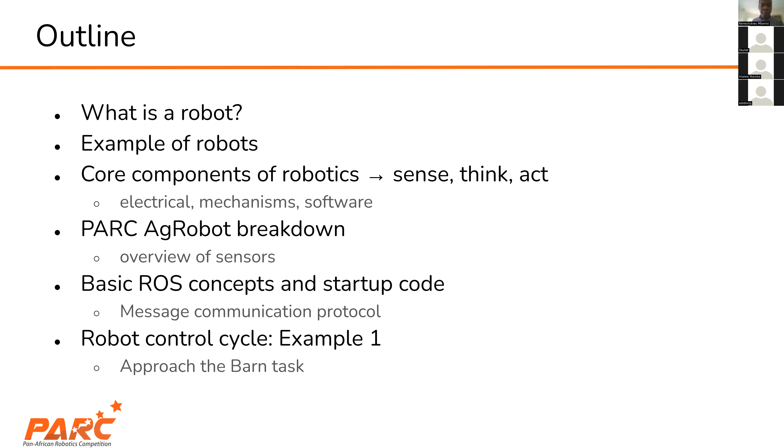All right, so we'll just go ahead and start. What is a robot? I think that this is an important question to grapple with. I wonder if anybody in the chat wants to unmute themselves and try to give a definition of a robot. What is a robot?

This is from a dictionary. A dictionary says that a robot is a machine that resembles a living creature in being capable of moving independently and performing complex actions.

Oh, sorry, Andrea, you need to... Okay, you can go ahead.

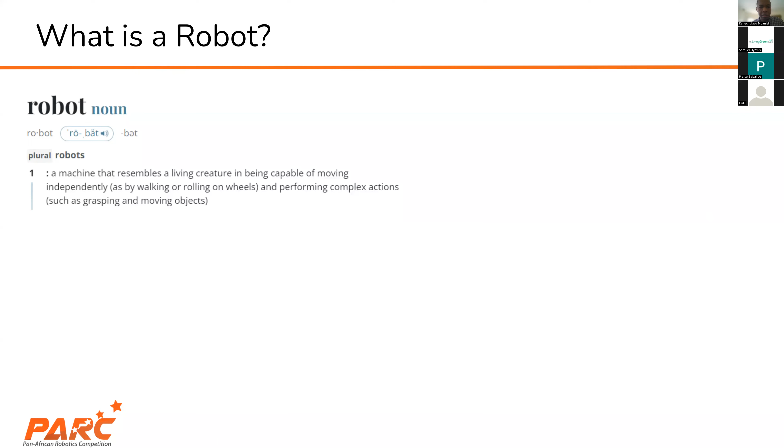Okay, so that definition is a bit too general. The only main thing it says is that it is a machine that resembles a living creature. That doesn't really capture what the robot is, I think.

So there's this other definition, this one is from IEEE, if you're aware of IEEE, Institute of Electrical and Electronics Engineers. It's a society, and they call a robot an autonomous machine capable of sensing its environment and carrying out computation to make decisions and performing actions in the world.

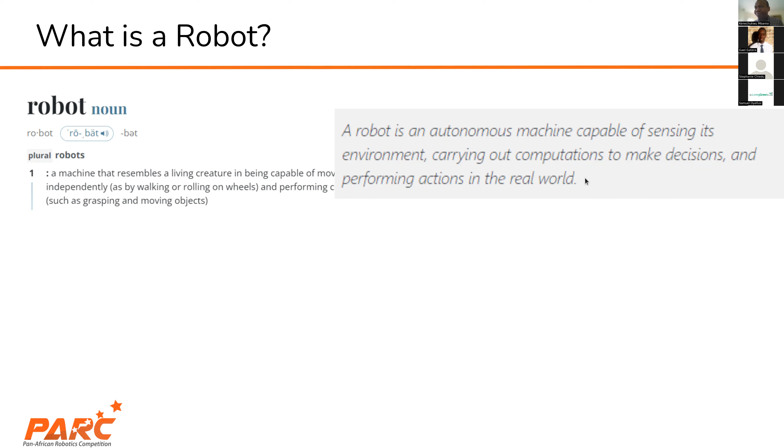All right, and then one other definition, this is from Wikipedia, also very similar. It says here that a robot is a machine, especially programmable by computer, capable of carrying out complex series of actions automatically.

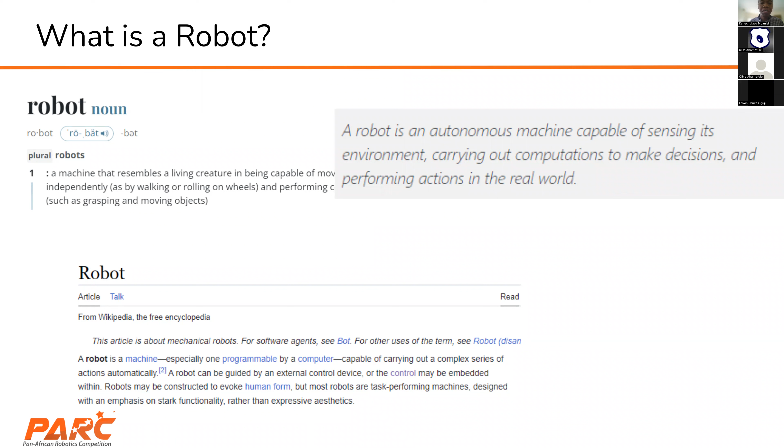All right, so now that we have maybe some idea of a robot, I searched on Google, just Google images, image of a robot, and this is what I got. If you search on Google, just put robot on Google, you will get these images. What do these images have in common? What is the common theme around all these images of robots? What is one common thing about them?

They look like human. Yes. Who said that? Who was that? I didn't see you. Is it Arnold? Arnold, yes, Arnold, you are absolutely right.

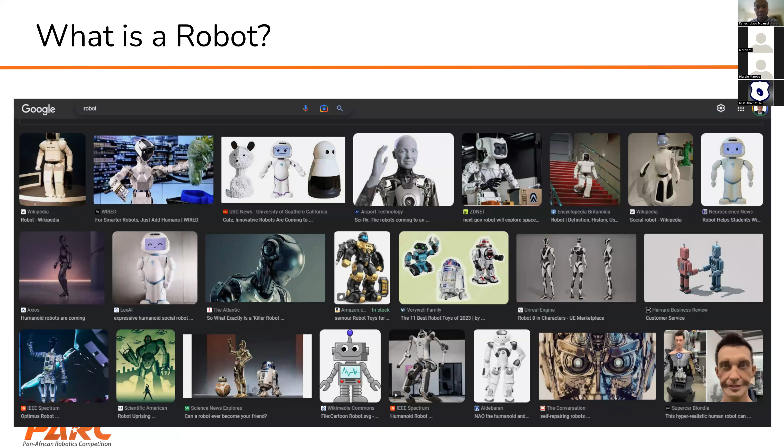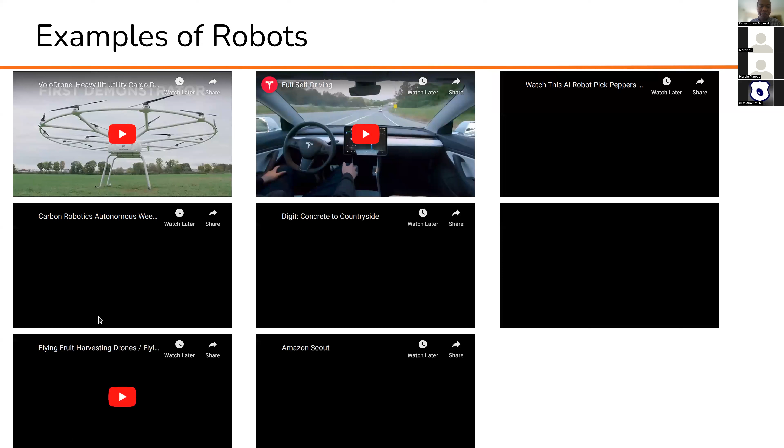Okay, so I'm going to show you a bunch of robot examples. They're all very different, and all very, very exciting designs. So hopefully you can see, I have a bunch of videos here.

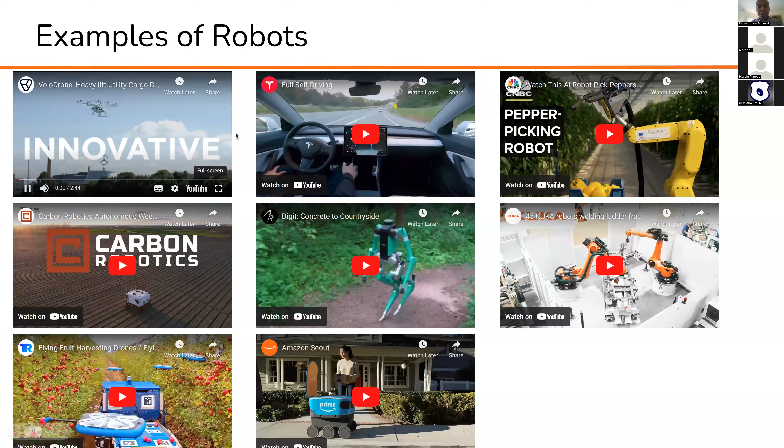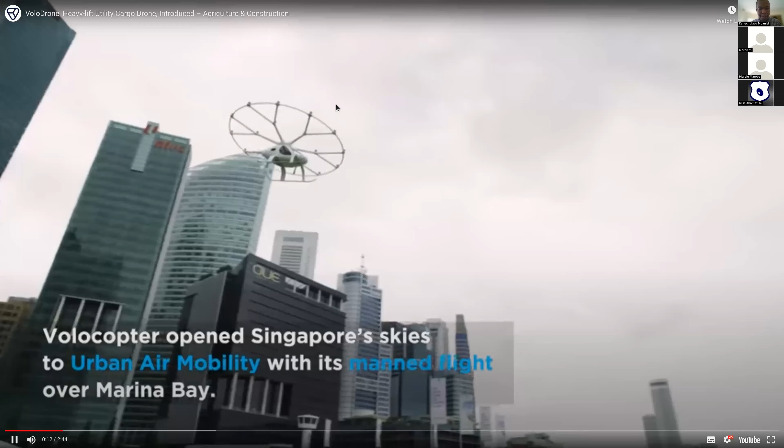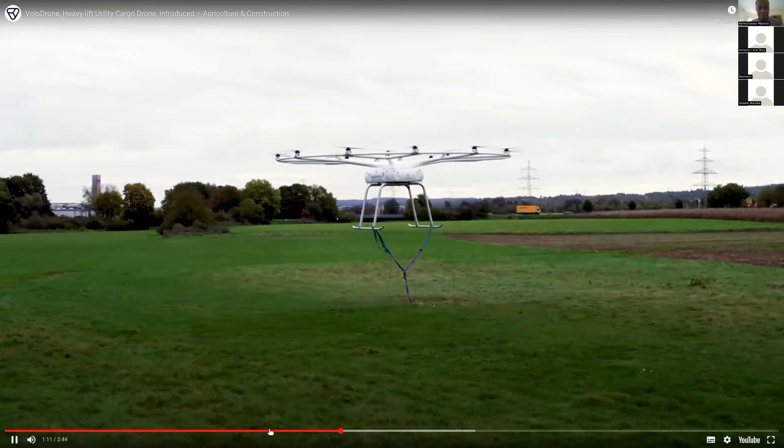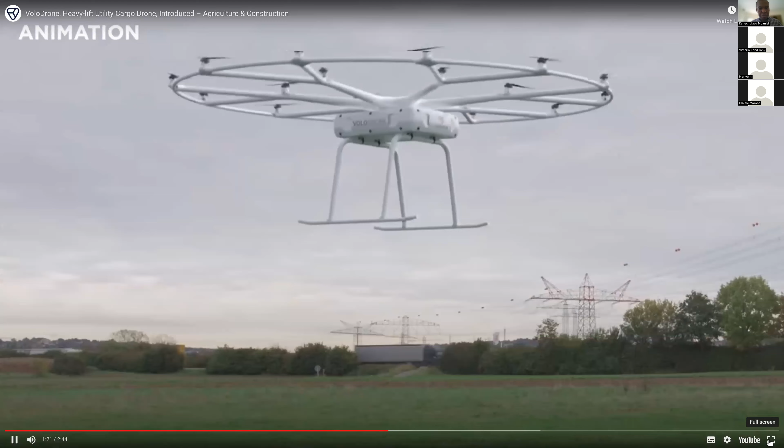All right, so that is one example. It's a cargo drone, heavy duty cargo drone. You can use it for delivery of items, you can use it to even transport heavy items and other things. So that's one example of a robot.

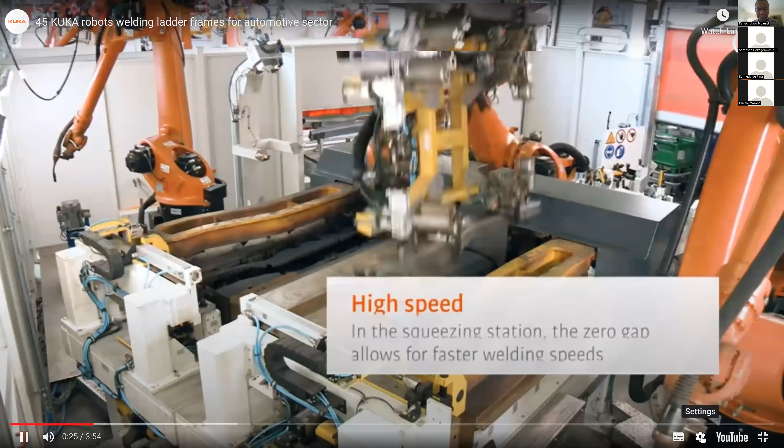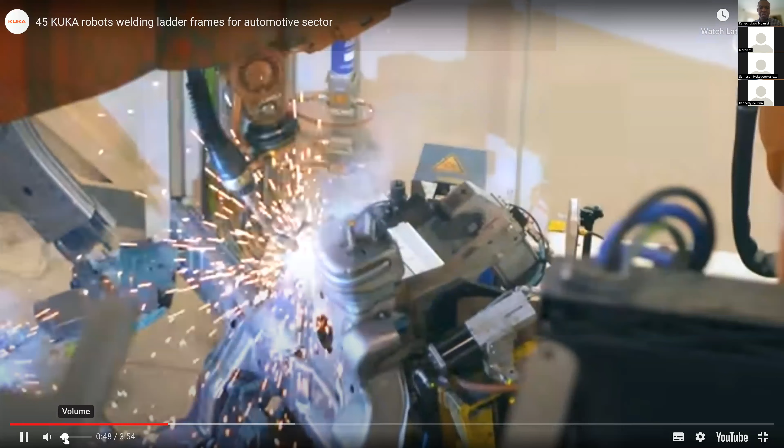So these are industrial robots that are usually applied in the automotive industry. These robots are actually building different components of a vehicle. The robots have sensors to know where they need to move to. They can pick up objects, they can place objects. And this way you can have a fully autonomous assembly line for a car.

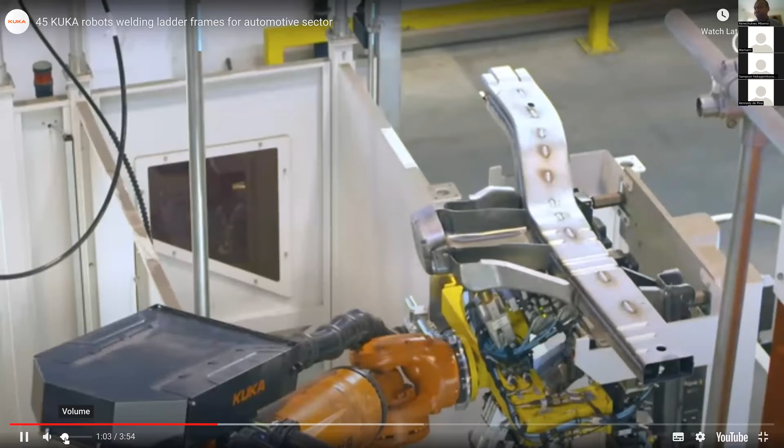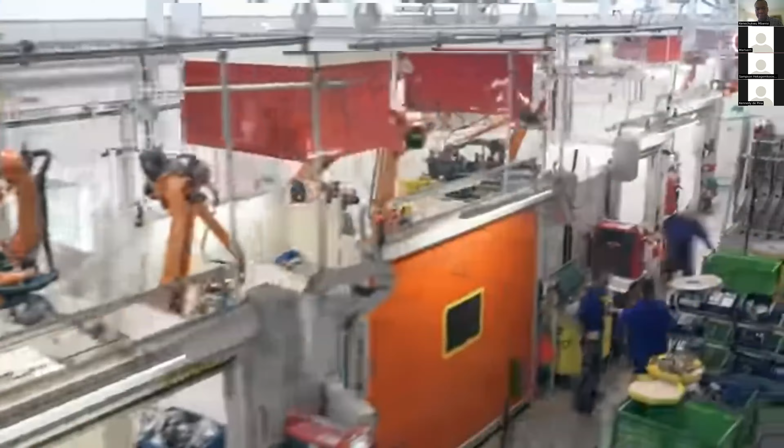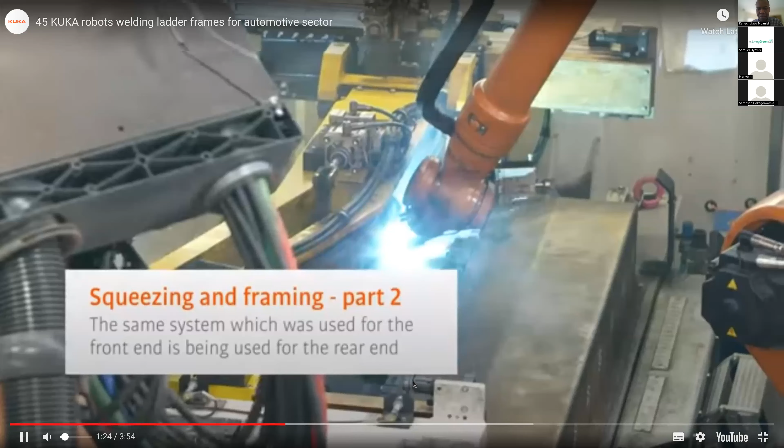Yeah, so you can see how exciting this is, right? You can have this type of robot that can fully automate a manufacturing line. Okay, I'm going to show us maybe one or two more in the interest of time.

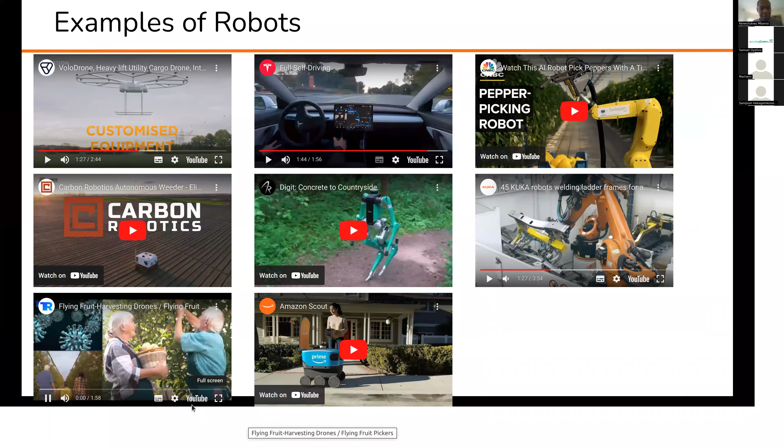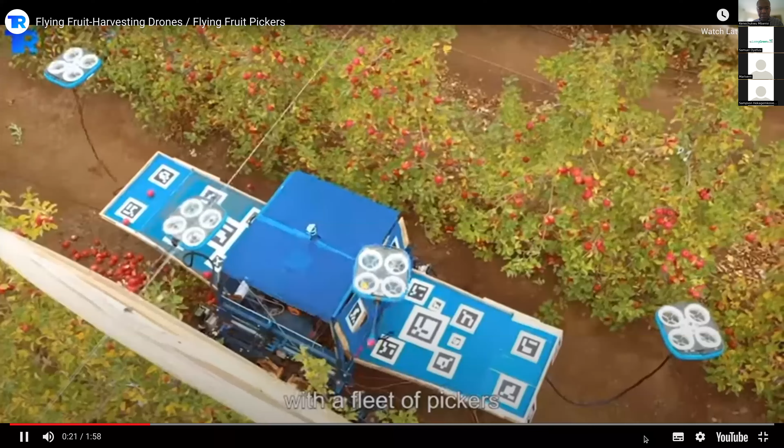Due to increasing risk of COVID-19 virus in the world, it's getting harder to find fruit pickers, which results in the severe shortage of workers available to pick fruit at orchards. So if there is no solution to this, farmers have to suffer from unemployment due to rising costs and low labor cost. Having an answer to this, Tevel Aerobotics Technologies found a technological solution by developing flying fruit harvesting drones, flying fruit pickers, flying autonomous robots, FAR.

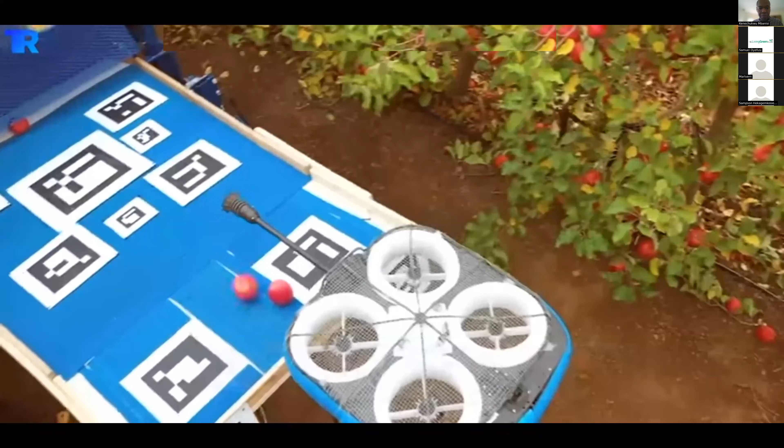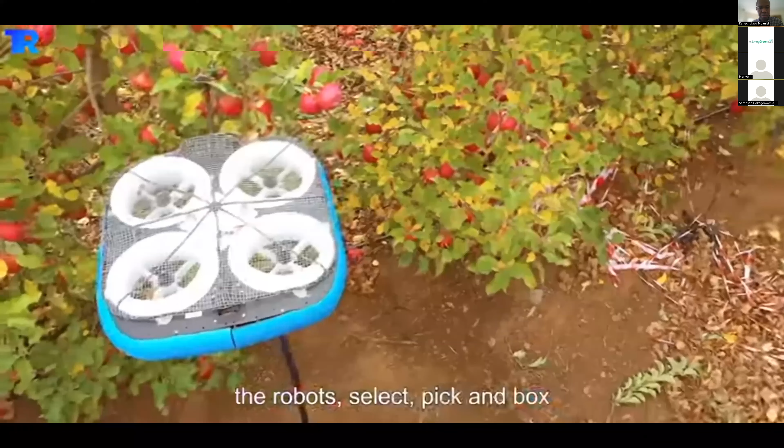Each of its units consists of a wheeled-based vehicle, which travels up and down the rows of fruit trees and acts as their power source. The robot picks only ripe fruit by classifying its size and ripeness. After choosing the fruit, the robot works out the best way to reach it, and its picking arm helps it to grasp the fruit. It can be said to be a 21st century way to pick fruit using Tevel's harvesting management application. We need to provide some necessary detail.

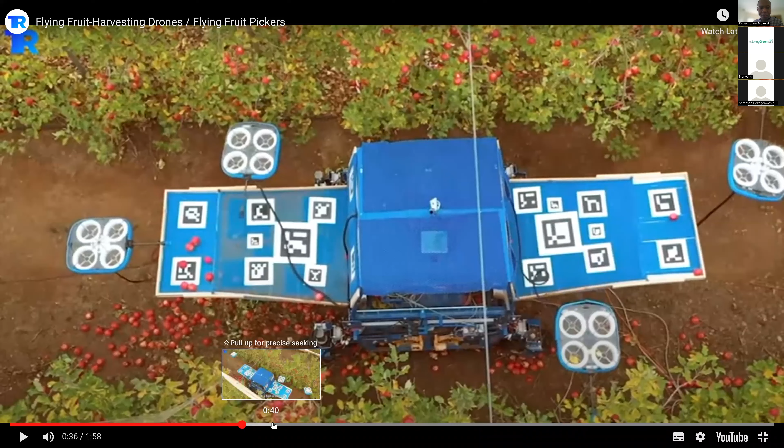All right, so that is very exciting, right? You can see these drones are used to harvest fruit from the trees from an orchard. Instead of having people struggle to reach very high in the tree, use a ladder, you can actually use drones to perform this. So this is really interesting application of drones in agriculture.

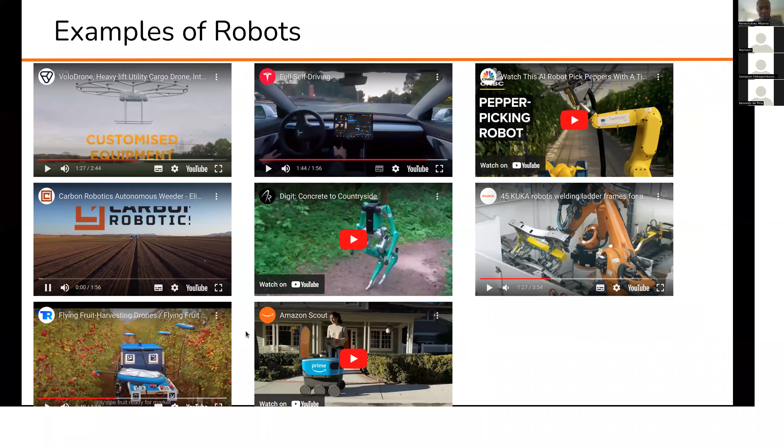Let me show us one more here, because this is agriculture focused. This is a robot that can be used for weeding.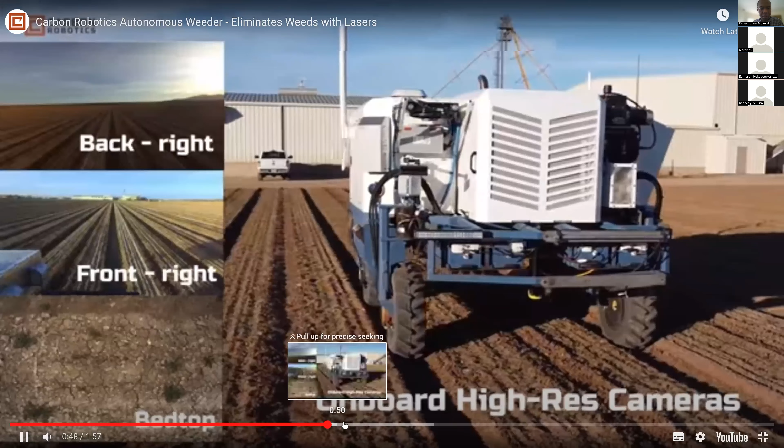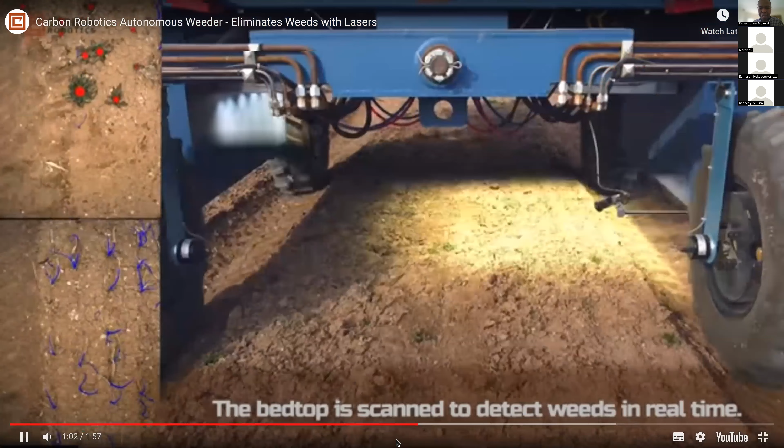Where you can scan and detect weeds. This is one of the tasks that you have in this competition, is to do weed detection. So similar to what you can see this robot, agricultural robot doing, using its camera to detect weeds on the ground.

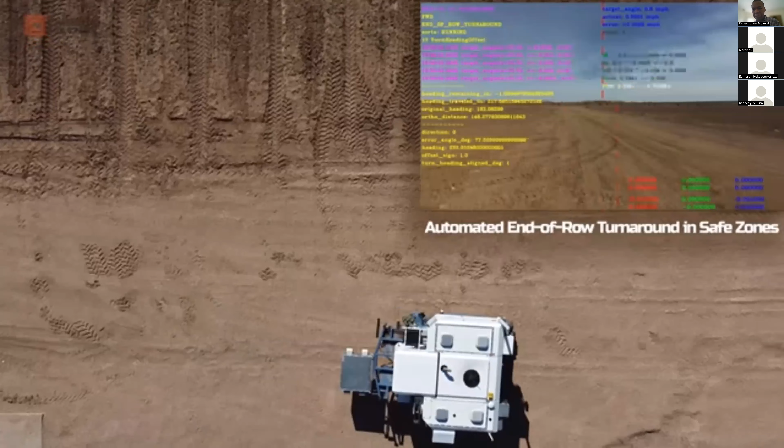Okay, and then also moving around the crop rows is also an important thing that will have you to do in this competition as well. These are important applications for agricultural robotics.

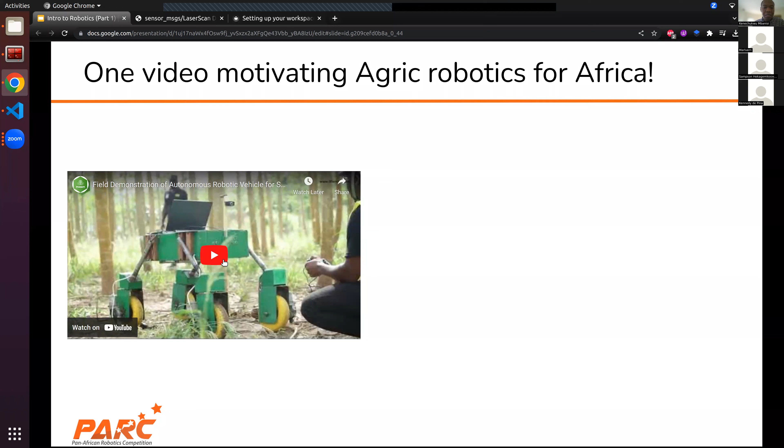Okay, all right. So just one more video I want to show you. This is of a small and growing company from Ghana that is trying to explore agricultural robotics. And there's a nice video that they have of some of their prototype system. And this company is also going to be attending the panel. One of the chief engineers in the company will be there to talk about the experience. So I encourage you to be there for the agricultural robotics panel in May.

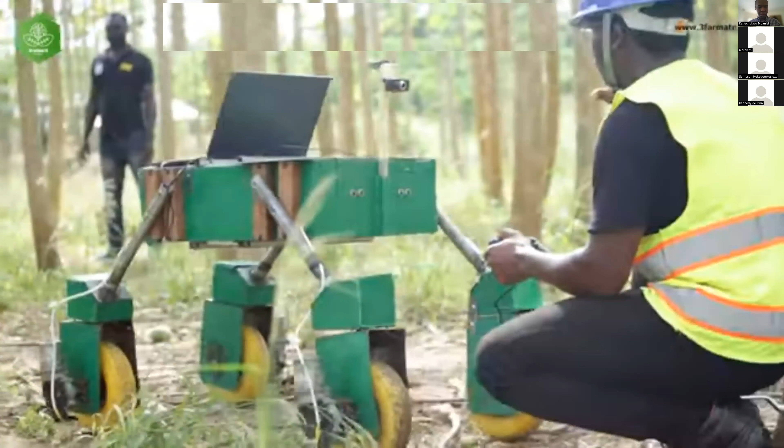All right, so that's very exciting. It's a young company that is starting out in agricultural robotics in Ghana. So those are just some examples of robots. But really, all robots do these three main things: they are sensing, they are thinking or planning, and they are acting. Those three things is what they do.

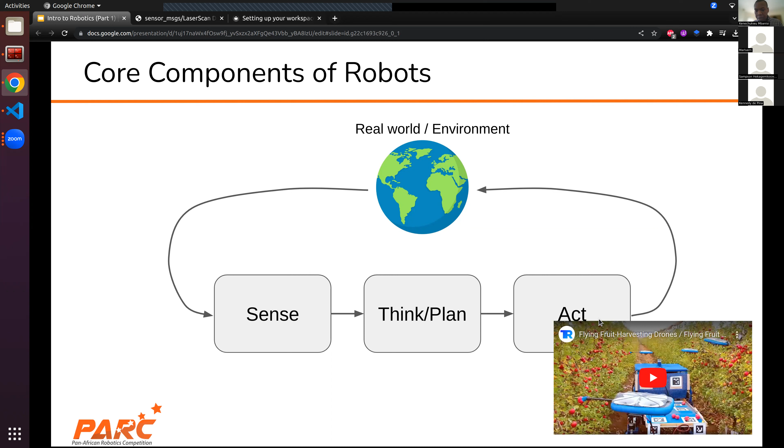All right. I will just move on from there. So the other core components, you can see how electrical engineering, software engineering, and mechanical engineering are all part of what makes up robotics.

All right, so we'll move on. I want to now show us the PARC agriculture robot. Okay, this is what you'll be using. If you already started, this is what you have in the simulation.

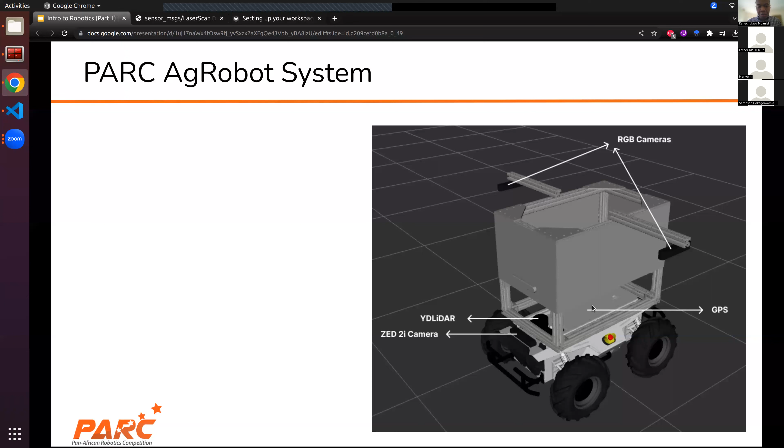Okay, I want to walk us through the different sensors. We have a number of sensors. The first sensor we have is a 2D laser scanner.

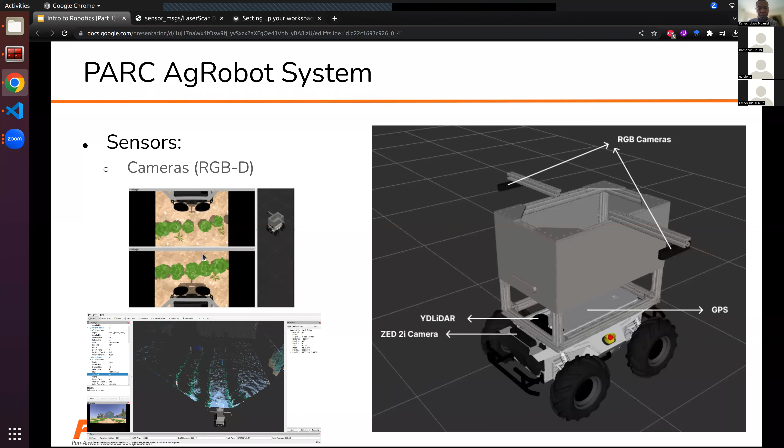Okay, and the third sensor that we have on the robot is a GPS. GPS means Global Positioning System. It uses satellites in orbit to track the position of things using a receiver. So to summarize, we have one GPS receiver in the robot, and with that we can collect GPS information, location information from satellites.

Donc, comme troisième capteur, vous avez un GPS. Et ce GPS sera relié à des satellites qui vous donnera la position exacte du robot.

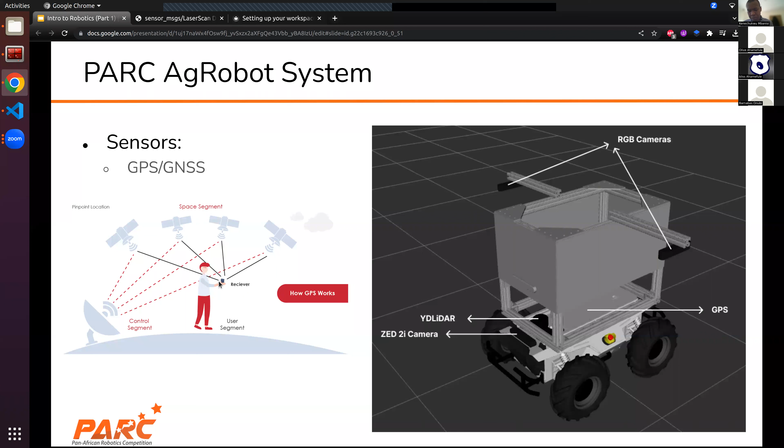All right, I think somebody else had a question, somebody else was trying to ask before Jamaica. Yes, I have a question. Is your laser working well? Because on this side, when we try to subscribe to the laser scanner topic, our robot started to just freeze. The real-time factor will be 1 constantly when you're not subscribing to the laser, and the moment you try to subscribe to the laser, it goes down to 0 and it just freezes. So I wanted to know, is your laser scanner working well, or is it an issue with our computers on this side? No, that's a very good question.

That's actually a very important question. That has been a major issue we have been trying to solve. There have been some conversations about this, not in the chat, in Slack. We have a solution to that problem that we pushed to GitHub today. So after this workshop, I will comment in Slack to update everybody about what we have changed to make it work now. We also noticed that same problem and have pushed the updates to GitHub so you can easily pull it. Once we finish this workshop today, I will give an update on Slack so everybody can know what we have done and how they can continue to use the current system.

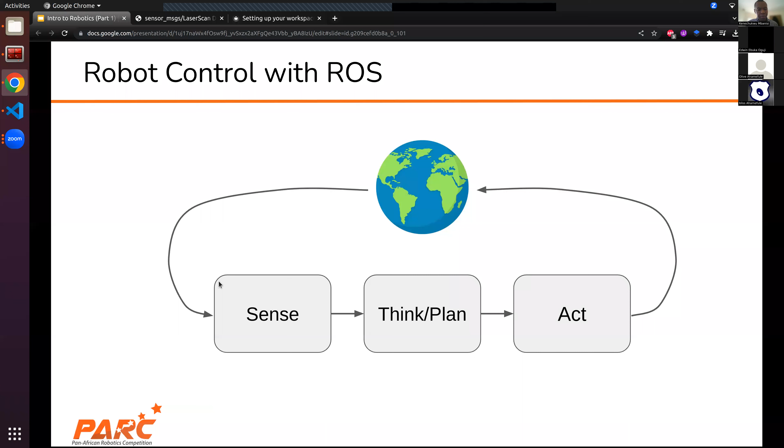All right, and this is the example. The example is a very simple example that I just made as an introduction, especially for those who are new to robotics or using ROS.

And the example is approach barn task. Okay.

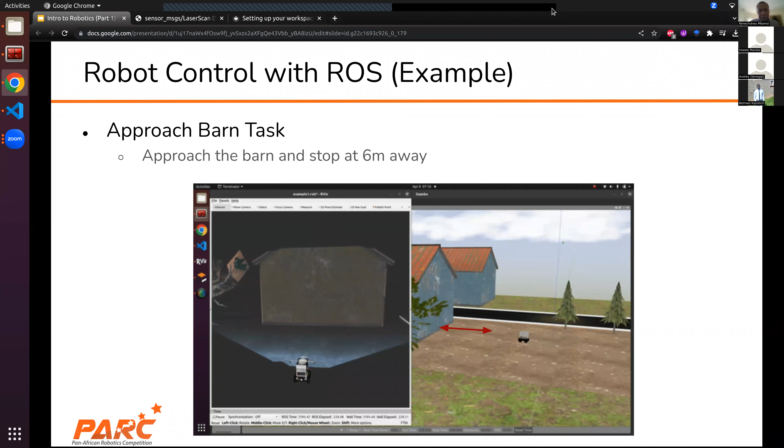All right, very good. So let's see what we have. Very similar to what was said by our two wonderful robotics guys here. Just to describe some ideas about how you can use ROS. For the sensing, I've only limited this to using the 2D LiDAR to sense the distance of the barn. The barn is in front of you, but it is some distance in front of you. You want that distance to become 6 meters and then stop, where you don't know the distance. So you use the sensor, the 2D LiDAR, to get the distance of the barn from the robot.

Okay, so maybe I summarize that you can use the 2D LiDAR sensor to sense the distance of the barn from the robot.

Sorry, do you want me to repeat? Would you like me to repeat that?

Yes, can you repeat? Right, so you can use the 2D LiDAR that we already talked about to sense the distance, or to measure the distance from the robot to the barn.

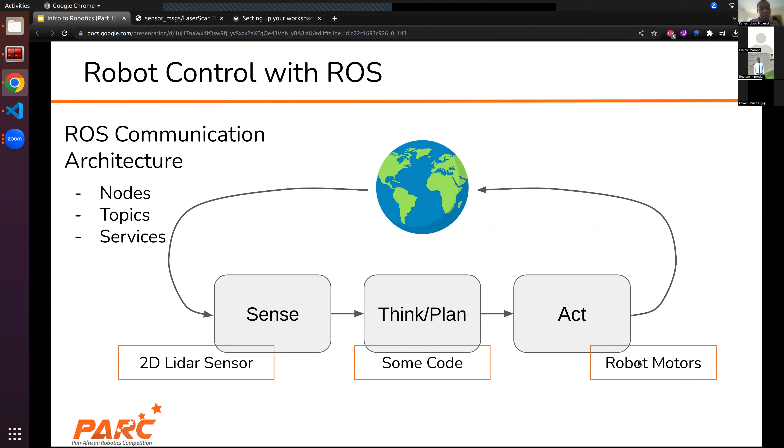All right, so please bear with us. I think Andrea is dropped off. Hopefully she can join back very shortly.

Just some very brief overview about how ROS communication works. This is an important part that you need to study. We have tutorials on the website that gives you nice videos that you can use to learn about how ROS communication works. We follow what is called a messaging protocol, where your messages will be flowing through what is called topics. So topics are the message definitions, and you can use messages to communicate between different nodes of your system. So this, if you're new to ROS, this might all be sounding very complicated. It's not complicated at all. The concept is simple, but maybe you need to be familiar with it.

Fundamentally, if your LiDAR 2D scanner has some data that it is collecting, and you need that data, you need to subscribe to the topic that data is being published on. You will be a subscriber, and you can receive messages from the LiDAR sensor. And if you also want to send commands to an actuator, like the wheels of the robot, there will be a topic that you can publish to, and so your code will be a publisher.

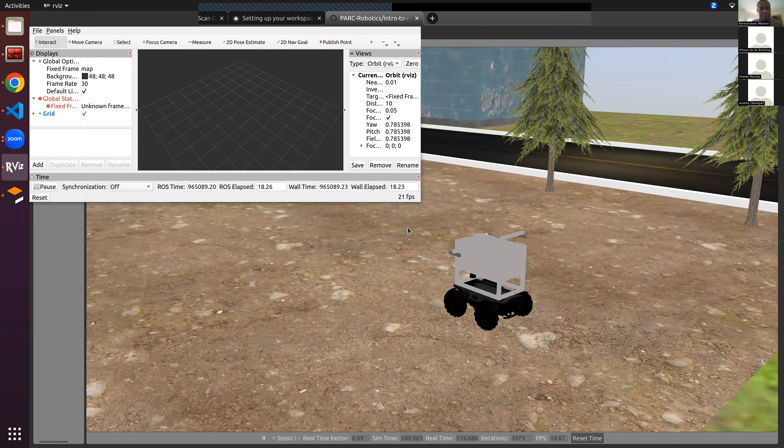All right, so like I told you, like we showed you, this is the farm, this is the barn here. This is the robot, and the goal is for the robot to move up straight until 6 meters away from the barn. Once it's 6 meters away from the barn, it should stop.

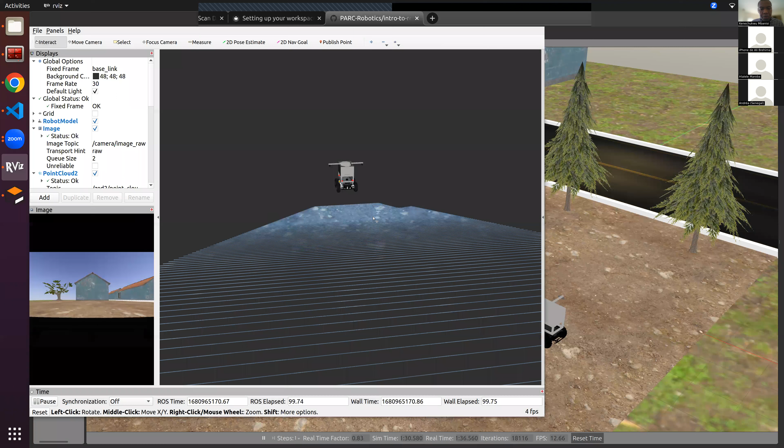All right, so hopefully you can see my screen. Can everybody see what I'm showing here? Andrea, is it visible to you? Yes, it's visible. All right.

So if you're new to RViz, some practice can help you to get more used to different things.

There are different sensor views here. This image view is the view of the camera facing forward. This is the camera view. You can see the barn in front here, and the trees. So this is the forward facing view.

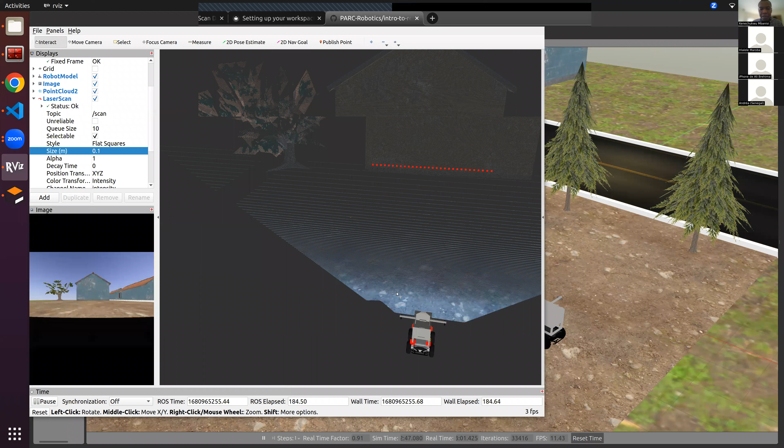Let me summarize that for you, Andrea. Wait, are you still there, Andrea? Yes, I'm still there. Okay. If you need me to summarize, you can just ask right away so that I can do that.

On this view, these red points are the laser scan points from the laser scanner. And this projection here is from the depth image. So these are the laser scan points, the red ones, and this is a projection from the depth image of the camera.

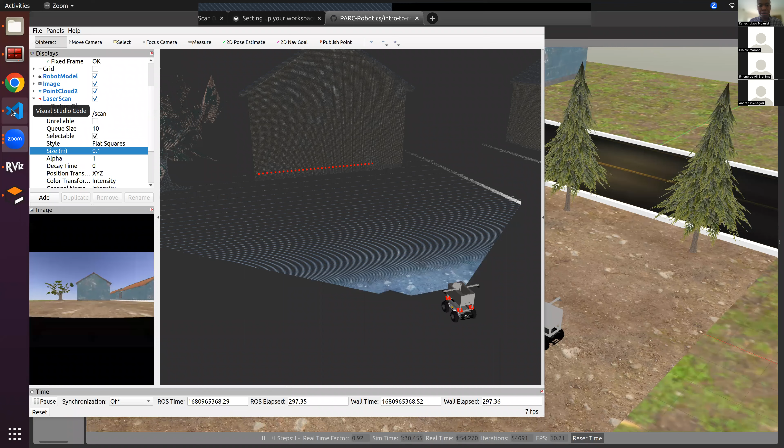All right, so that is good. Now I actually want to get into writing the code. So we will come over here and we will try to write code together.

Let me go back one step. Remember, this is how the LiDAR works: it sends out rays in all directions, 360 directions, and based on where it is reflected from, it will measure that range or that distance.

Okay, let me repeat that. The LiDAR sensor sends out rays in all directions, 360 directions, and based on where that laser ray is reflected, it will use that information to measure the distance in that direction.

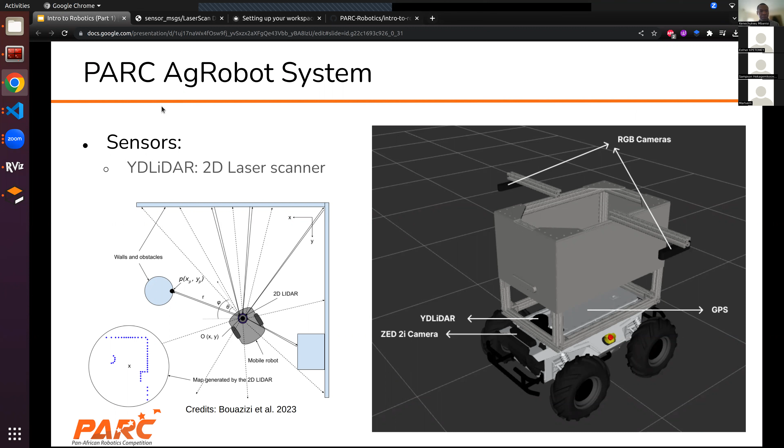All right, and so that is captured in the ranges here. That is what you see there.